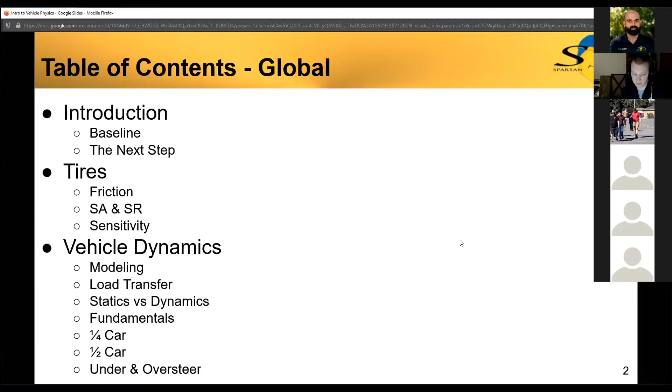Just to reiterate what Ross said, ask questions if you don't get something—there's a slide about it. So we'll be going through an introduction, a baseline of what we're talking about, and next steps. Then we'll be talking a lot about tires, and then we'll slip into vehicle dynamics. Hopefully you guys will be asking questions the whole way.

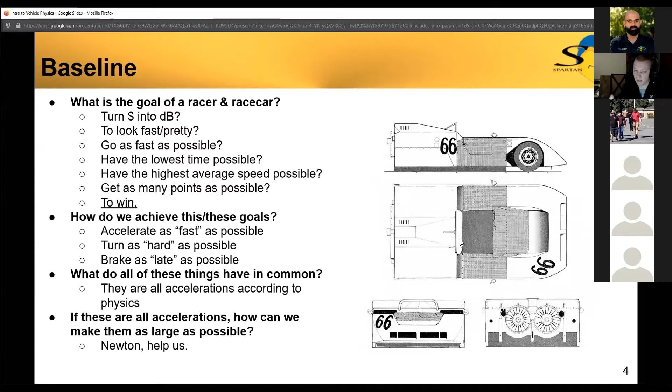Did we skip this? Oh yeah, we skipped a slide. Okay, so how do we take that to the next step? Newton's first law: objects at rest will stay at rest. You guys should all know these from high school physics. At rest in this case means in your local frame of reference. So if you're sitting in your car going 60 miles an hour, you are at rest with respect to the car.

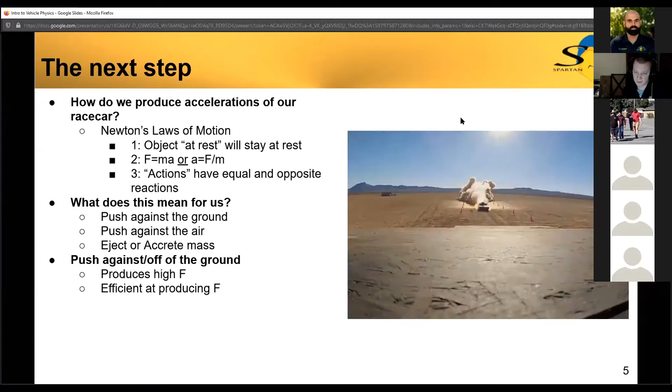F equals ma, or force is mass times acceleration. But since we're trying to maximize acceleration, it's easier to think of it as acceleration equals force divided by mass. So what we can immediately see is if we want to maximize acceleration, we need to up the force or lower the mass, or both.

And then, actions have equal and opposite reactions. What this means is basically you can produce a force, but it won't do anything unless some other force reacts against it to push you, right? So if I push against the wall, it pushes back with the same amount of force.

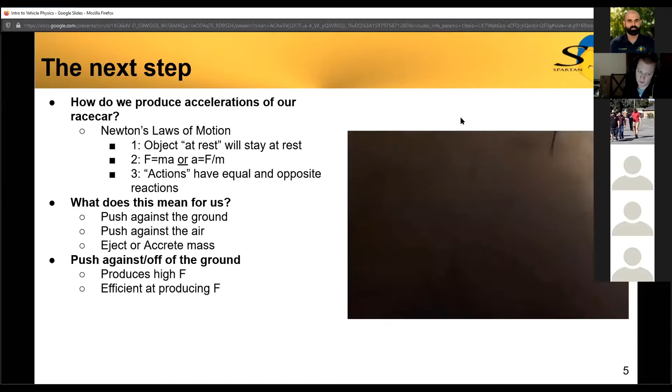So what does this mean for us? Well, we have very few things that we can push against. We can push against the ground, we can push against the air, and we can eject or accrete mass. So basically, have a rocket eject mass, or like a snow plow building up snow in front of it would be accreting mass, which isn't really practical.

So for us, the most practical thing to do is to push against the ground. And we only have 4 ways to push against the ground, and they're all tires, all 4 of them. They're one of the best ways for us to do it because they produce high forces and they're efficient at producing force. What I mean by that is, if we want to produce a lateral force, they don't produce a lot of drag force necessarily to do that, so we don't have to then produce even more longitudinal force to overcome drag.

So as a quick recap of the initial physics, physics can help us settle down to what we really need to do to win. And how do we win? Well, we get points, we get low times by making lots of acceleration, which in turn happens by making lots of force and/or reducing mass. So the way we produce forces is through the tires, through most of the forces anyway. So at the end of the day, every sub-team, from vehicle dynamics to aero to chassis to powertrain, we all serve the tires, or we serve the driver, to make it easier for the driver to serve the tires.

Anybody else? Okay, so we've established that everything comes through the tires pretty much. So let's talk a bit about tires. How do tires produce the forces that we so value? Well, first of all, how do we push against the ground? We don't have a Fred Flintstone vehicle, so we don't drive it with our feet. Tires are the only way we contact the ground, so we produce all the forces with the tires.

How do we get the most force out of the tires? Well, let's think about how tires work. So the traditional, what you learn in school, definition of friction is equal to mu times normal load. Normal load is the vertical load down on the tire, or on the object against another surface. So if you push down on a brick on the table, you have a normal load times its mu, and that allows you to push sideways a certain amount before it starts to slide.

So what are the laws governing this? Well, when an object is moving, the friction is proportional and perpendicular to the normal force. What that means is, with a brick sitting on the table with a normal load on it, we're allowed to push perpendicular, we can put that perpendicular force on it. Proportional, in this case, means if I increase the normal load, if I double the normal load, I'm allowed to double the side load before it starts slipping. That is something that is not true for tires, so I would call it semi-valid. Perpendicularity is still true, but proportionality is not true for tires.

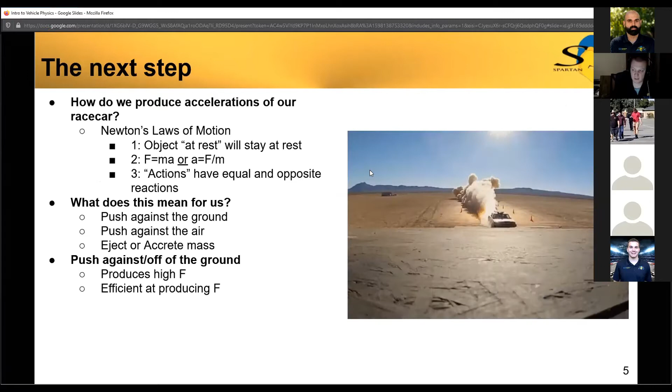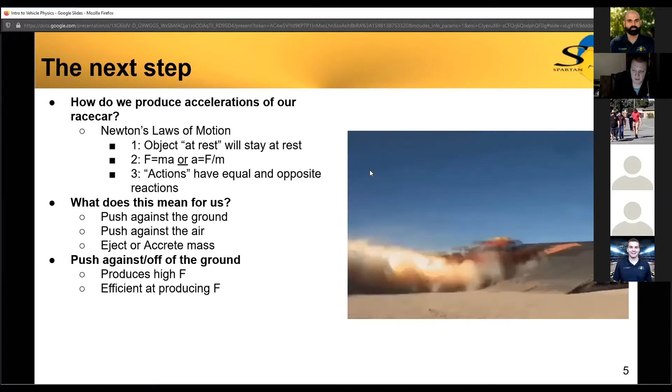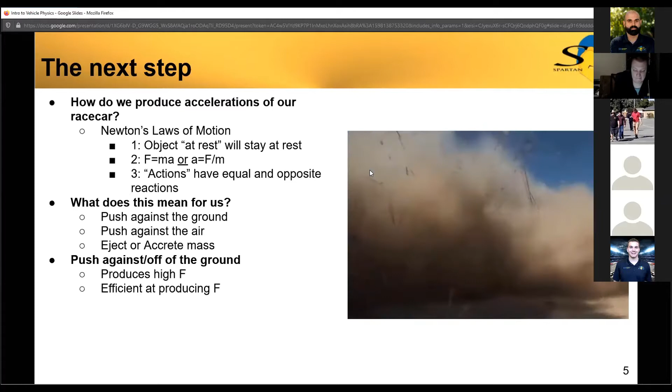Would that be 800? So the car weighs 1,600 pounds. If we divide it by 4, how much is that per tire? That's 400 per tire. And then if you have 2 turning tires, then that'd be 800, right?

Ooh, that's good. Okay, so we will get to why that is incorrect. But let me just say all 4 tires turn the car. So now how much is it? 1,600 then. Yes, hey, that's correct.

So if we increase the weight of the car to 3,200 pounds, how much lateral force could we produce? Would that then become 3,200? Well, so again, if the car weighs 3,200 pounds, how much load do we have per tire? Assuming it's evenly distributed still. That's 600, right? I apologize, I can math, I swear. Wait, 1,600 times 2, 3,200.

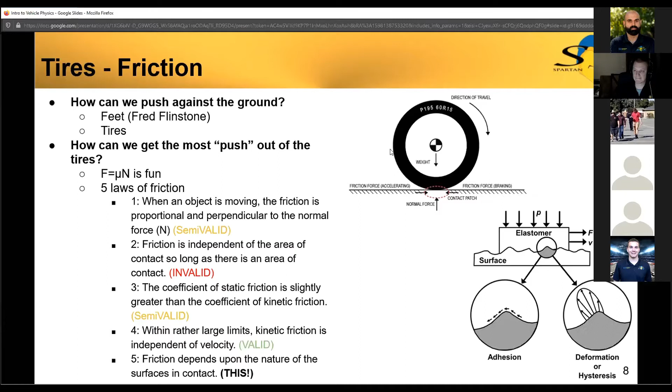I can't. They say understood. Okay, cool.

We are done with tires, and we've gone through all the questions. Tire modeling and tires are complicated, and I don't know everything about them. The only guy that probably does is Pacejka. TU Delft makes their own tires, so they're probably the best people to ask. Tires produce almost all of the forces with which we drive the car, longitudinally and laterally.

Tires produce forces by distorting the rubber at the contact patch, and we simplify those distortions into usable numbers by talking about slip angle and slip ratio. Slip angle is turning the tire with respect to the rubber and the contact patch on the road, and slip ratio is with respect to trying to torque the tire forward or backward with respect to the contact patch and the rubber. Normally those things will be in static friction.

We talked about static friction force being higher than kinetic friction force, in terms of doing a burnout versus accelerating smoothly. Tire friction is very sensitive to outside variables, some of which we have control over. I'll harp on this again: normal load sensitivity is very important.

Temperature sensitivity, we talked about with different events, can be very important. Surface sensitivity too - if it rains, or the surface at Lincoln is scored concrete, which has a different mu than the surface at Michigan, which is asphalt.

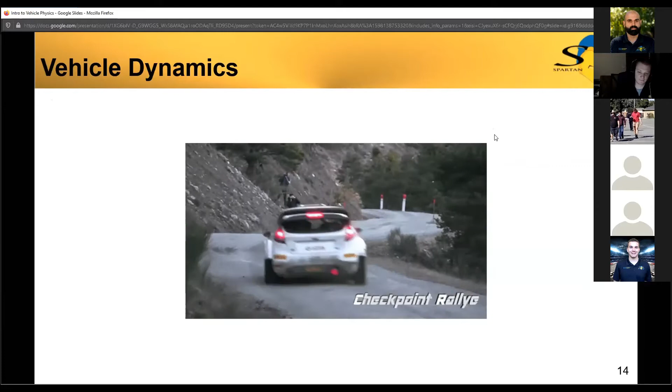So we skipped - this is vehicle dynamics. Welcome. It's mostly about keeping loads as evenly distributed as possible. This will be the very fundamentals of vehicle dynamics.

We're going to try to explain it in a way where even if you're a freshman, you can gain some intuition about it. First, I want to talk about modeling a little bit, because we do a lot of it in vehicle dynamics, but this stuff applies to anybody on the team, whether you're doing an FEA on your brake rotors or a CFD sim on your wings. All this stuff really applies.

Whenever we model something, we're making an abstraction of reality - it's not a one-to-one of what's really going on. We generally make simplifications when we want to model something, and it's important to know what simplifications we're making and how that might affect the results of our model and what we're seeing. So when you go about modeling, whether it's FEA, CFD, or some of the stuff we do here in VD, you want to think about what you want to model.

So that will tell you what you're trying to get out of it. And with that in mind, you only want to make your model as complex as it needs to be. You don't want to make it arbitrarily complex, adding computation time or factors that don't really matter. The more complex you make it, the more room you add for mistakes.

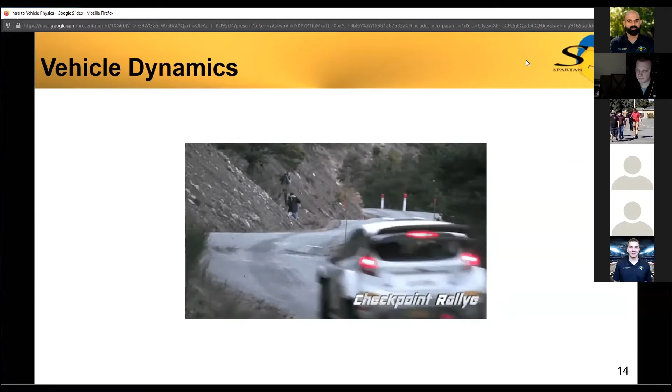Load transfer, maybe? Yeah, that's a very good one. You would also want to model your aero loads, right? Maybe not in the same way the aero guys do CFD, but your aero loads go into everything — that affects the amount of force your tires make. You need some model of a powertrain, a braking system, as far as what forces and torques it can generate. So you do a little bit of everything because we're concerned about the vehicle as a whole, maximizing our accelerations at any point so we can win.

And one other thing I would add is it's very important not just to understand the fundamentals and draw free body diagrams, but to know how you'd recognize garbage. So if at all possible, it's important to go back and look at data, or collect data if you don't have it, to validate whether your simulation is producing garbage or values you'd expect.

That's a great point, because oftentimes you won't know if it's garbage unless it's ridiculous — like, oh, our car can go infinitely fast? Yeah, my model's probably garbage. But oh, we can produce 2 Gs of acceleration? Maybe — but we should probably go collect some data and see if that's true. That's a really good point. Cool, I don't know if I have anything else to say on that one.

Okay, Ross, you want to take it away? So Cass, you brought up an interesting point, something called load transfer or weight transfer, depending on who you talk to. A lot of people don't like it when you say weight transfer, but I like to say weight transfer, as long as we understand that weight is not the same thing as mass.

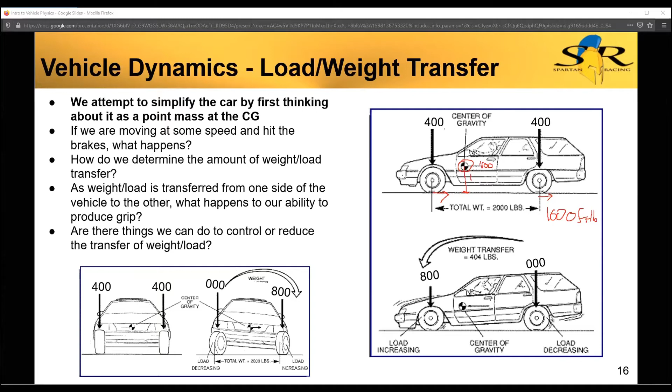Does everybody understand torque, like how torque works? I don't know if we have freshmen in here that may not have gotten that far yet. Hopefully, if we do have some freshmen that don't understand this, they will speak up because it's important. I have no idea how torque works. Oh yeah, me neither. Can you explain? I could tell by your tone. All right, Arash, you can explain torque.

Okay, so I guess the simplest way to think about torque intuitively is imagine if you had a bolt that was tightened down on something and you wanted to remove it. If you just grabbed it with your fingers and tried to unscrew it, it would probably be pretty hard. But if you grabbed a wrench and put it on, all of a sudden it's a lot easier to loosen that bolt. So you have a point here, and now you have your wrench handle, and you're putting a force this way. So that force and this lever arm here is going to create a torque - it's going to amplify the effects of your force on that point.

Another way to think about it: if you're going to open a door, there's a reason why a doorknob or door handle is on the opposite side of the door from the hinges, because that force you apply on the opposite side of the hinges makes it a lot easier to open the door. Imagine, you can get up and try this right now - it's a lot easier to open and close the door pushing from the doorknob than pushing from right where the hinges are. So it's basically some sort of lever arm amplifying the effects of your force and the rotation that it causes. Thank you.

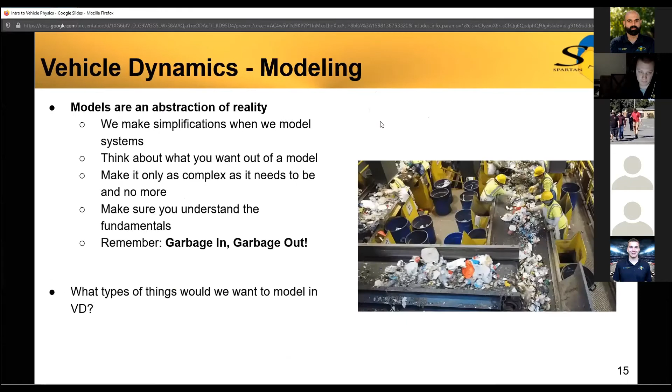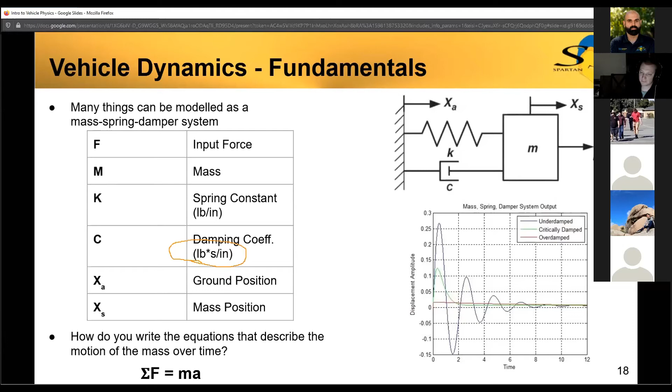So if you think about the case of our car, if it's the driver putting in a steering input and the car's rolling, that interaction or that input is going to have a different velocity than you driving over a speed bump at 100 miles an hour, or driving over a pothole, which is all going to give you different damping. Yeah, if I may for a second.

Most of us have driven down the freeway and seen a car with quote unquote blown shocks, right? So their dampers are not working particularly well. If you see them driving down the freeway, they hit a bump and the car just goes whoa whoa whoa. That's because there's no force slowing that oscillation, which is what the dampers do. Sometimes you can even see their rear tire, or whatever tire has a blown shock, just rapidly going up and down.

So yeah, the damper provides a force. Let's say the spring's providing a force this way, the damper is going to provide an opposite force that kind of slows down that motion. You can think of it like friction. In some cases it's literally friction, in some other cases it's not, but you can think of it like a friction force that's slowing down the mass's motion and controlling it.

And I think the example we were using here was, if we go back to the example we used earlier to talk about torque, we talked about opening and closing a door at the door handle versus at the door hinge. So if you think about the doors at school, they have this thing at the top usually, and that's a damper. So if you open the door and you let go, it doesn't just smack back in your face, it slowly comes closed. And if you're an asshole like me and you open the door and you see someone behind you and you want to try and close it on them, you have to push really hard to close it, because the damper is fighting you the faster the door tries to close.

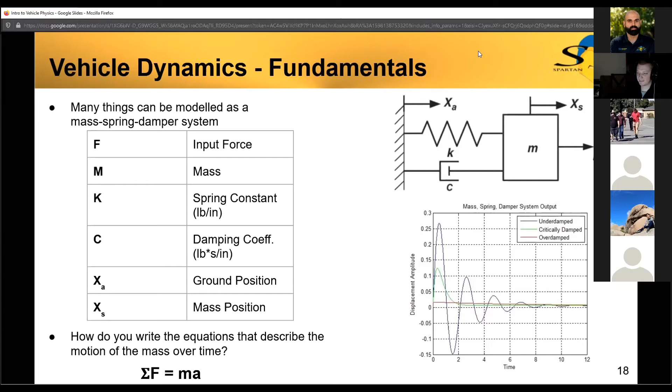Does everyone understand the basics of a mass spring damper? If you need clarification, please speak up. Again, this only gets more complicated. Yes, it's going to get more complicated. Okay, understand how it works and why those oscillations are important.

And tires are actually air springs, so they actually have a spring rate, which might have been intuitive based on how we were explaining them so far. The tire spring rate can change based on how much pressure you put in the tire. If you've ever seen a car driving down the road with a low tire, you physically notice that tire is a little more squished because it has less air in it, so it has less spring rate. It's not going to hold up the car's weight as well as a really pumped up tire. So pressure can affect the spring rate. Temperature, by the way of changing pressure, can affect it, and temperature can also change the properties of the rubber, which can affect spring rate, and so can normal load.

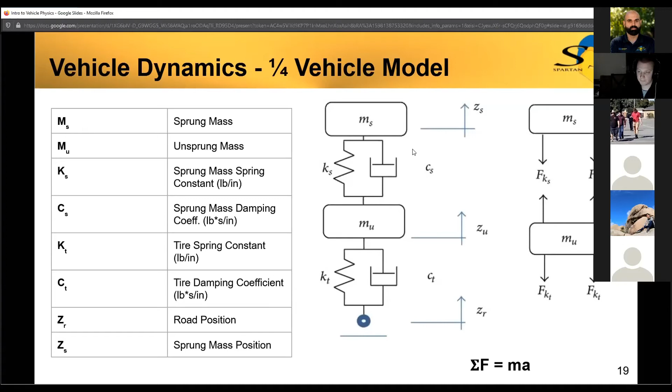Yep. All right. Thank you. Speaking of half car stuff... funny you should ask, Cass.

So what I'd say is we actually took the quarter car model and threw it away, because that was moving vertically. We are ignoring vertical movement here. We're assuming we're driving on a piece of glass - it's perfectly smooth, there's no bumps up and down.

Exactly, you imagine this is like one atom high car. That's what it is. So what a half car model does - where a quarter car model let us look at some dynamics of suspension and dampers and everything, this lets us look at a very simplified view of the dynamics of the car, at least in acceleration.

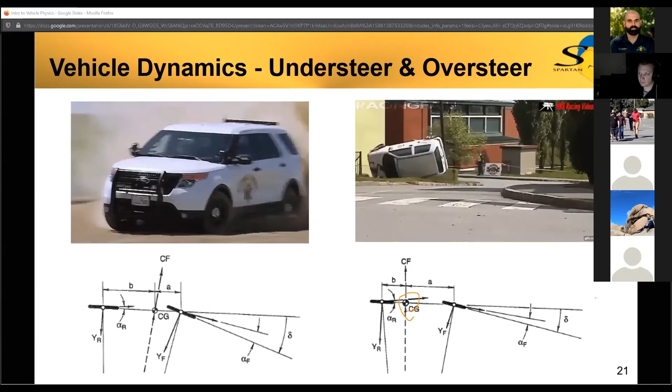So now we have a force from the rear tire, and now we have a shorter lever arm than the front. So what does that say about the force from the front? It has to be lower, right? And how do you generate a lower force in order to balance this moment? You steer less, so now you need less steering. So for this car, if we had that same radius corner that the 50-50 car went around, to make that same radius corner, you would have to steer less because now your front tire has a bigger lever arm, so it needs less force to balance the moment from the rear.

Thanks, Trevin. So now, go ahead, dude. Sorry, so yeah, I actually have a question.

When you go into this kinetic friction mode, does rotational velocity of the tire matter, or is it just based on mass, direction, and the initial inertia you have? You mean how fast the tire's rotating? Yeah, like if you just let go of the throttle versus if you hit the brakes. I mean, I guess it doesn't matter once you're in the kinetic phase, or does it?

Letting go of the throttle and hitting the brakes changes your weight transfer, which can change how your car behaves. But I thought once you're in the kinetic phase, none of that really matters too much. It still matters, right? The tires aren't like where you have grip and you just fall off a cliff. You have some room where you still have force after the limit, so you have this region where you have less force, but you can still produce some force. I see, so that makes sense.

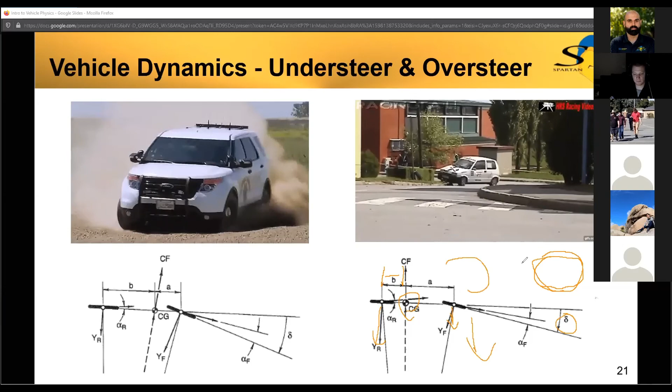Let me just finish my thought on this real quick. For the oversteer car, like I said, for the same radius corner you need less steering. So if you had the same steering as a 50/50 car, you're going to be turning a smaller radius corner because now the front is going to have a higher force. You're going to have a net moment in, so it's actually going to turn a smaller radius, or it's going to oversteer the corner.

That makes sense? Yes it does. Okay, thank you. Hey, I just thought of something else—let's just put the CG aside, make it fixed. Can you go back to the first few slides where there was a graph for the tires?

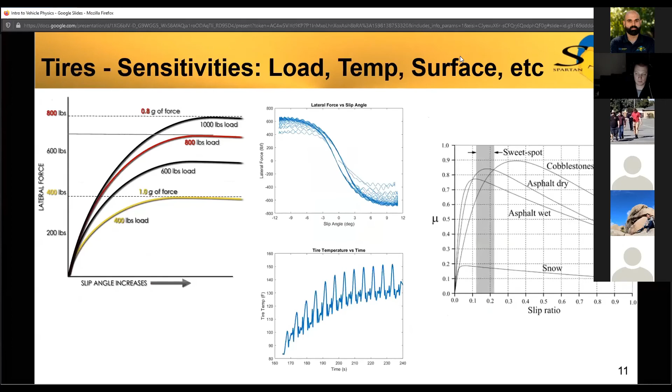The tires, this one? Yeah, the one with the blue and the green curves. Okay, so on the graph, where would the position of the understeering and oversteering cases be?

Okay, so if we're talking about non-kinetic friction, let's stick with the understeer case. The rear slip angle is lower than the front slip angle for a given radius corner. So your rear slip angle might be here and your front might be here. If the driver is right at the limit and not in kinetic friction, they'd be driving with the rear slip angle here and the front slip angle here. But if they go any further, they're going to start going into kinetic friction on the front tire, and that may or may not be faster.

Actually, if we think about it theoretically, it would be fastest to drive right about here, on both sides of the curve. Oh, actually in this case that would make it an understeery car—that would cause you to... no, that would not be faster. You would want to be driving where your front tire is able to generate more force. Oh, you do need that extra force. You're right—because otherwise we're plowing. If you have equal force, you're going to have that moment from the rear tire pulling you out of the corner.

So your front tire could maximally be here. Otherwise your corner radius is going to increase, or you're going to plow out of the corner—you're going to end up like that cop.

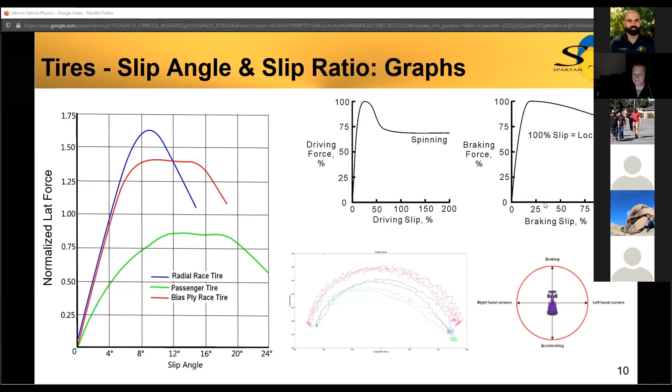You can't see it in the GIF, but there's a donut shop off to the side. Yeah, exactly—good thing we don't have any cops in the audience. It's fine, my father-in-law's a cop, he would laugh. I see, yeah.

Is understeer and oversteer clear to everyone now, and also just the basic, very fundamentals of steady state stuff? Yeah, and oversteer and understeer can exist in kinetic friction too, but the drawings at the bottom would be way different.

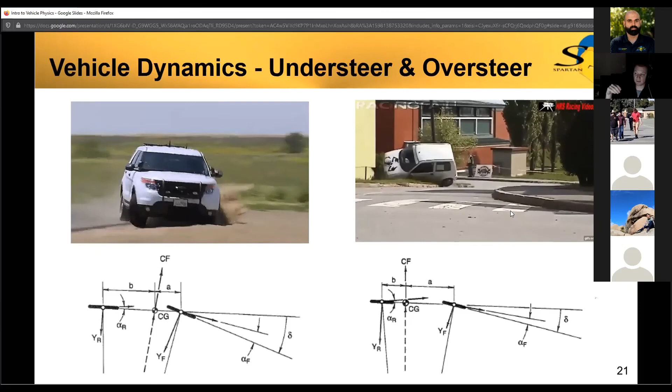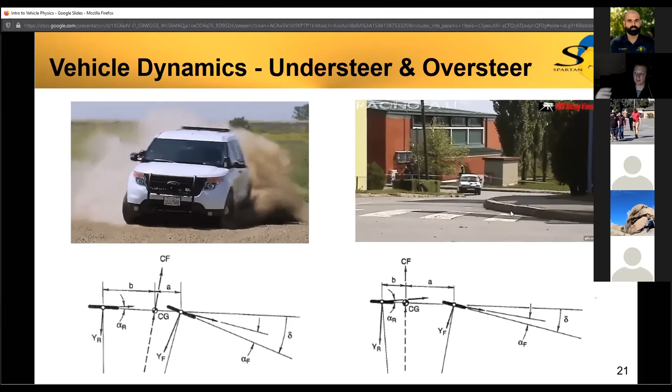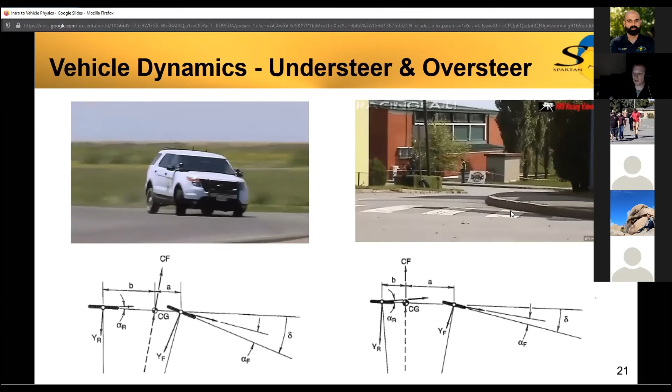Someone mentioned something about the speed relationship, and without getting too deep into it, one intuitive thing to think about—that everyone has experience with—is how your car steers in a parking lot. At very low speeds, you intuitively drive differently so you don't clip things, because the rear cannot generate large slip angles when you're moving very slowly. It doesn't have time, or distance in this case, to produce the slip angles to move the rear of the car. So you go further before you turn the wheel sharply, in order to go around things.

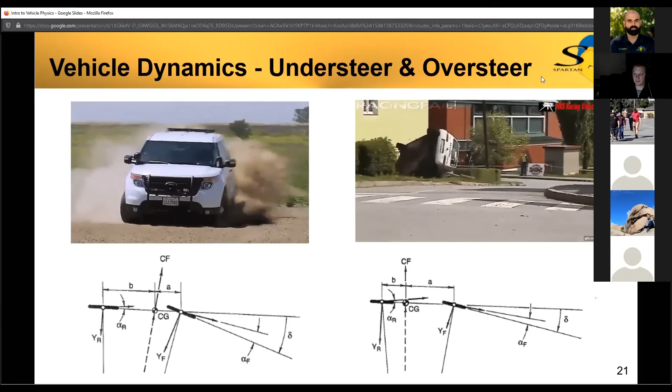Alright, let's do some recap and then try to finish up. We've gone way over, but that's just VD life. Yeah, no, this has been great. Thank you, guys, I'm glad.

I hope some of this stuff sticks, or at least makes intuitive sense, and you understand how the car works better now—why aero works, why you need shocks on a car, and what's happening when you turn the tire. Or you find a way to apply it to your particular section.

Now you can see why the 911 is so oversteered too. What? Yeah, for sure.

Like we said, as you guys have probably seen, VD and its modeling can be pretty complicated. This is as simple as we could try and make it. It only gets worse from here.

I actually had a full head of hair before I started on VD, and look at me now. Arash does all the work. I don't do shit, that's why I'm not bald.

So with VD, we try to model the behavior of the car and how it reacts to different things in order to make it faster and easier to drive. You can look at things like steering force, steering effort, and steering angle needed to make it easier to drive. Like I mentioned before, you only want to make the model as complex as it has to be and not anymore, otherwise you're just trying to flex or making your life harder for no reason. Make sure you correlate your model to reality to prove some validity to it, one to intuition, and two to some sort of test data or physical actual data.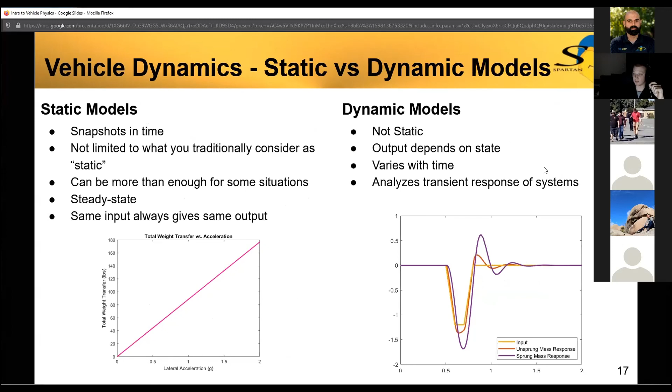Which tires turn the car, or cause it to produce lateral force? Or yaw, either way. Talking not about yaw, I'd say the lateral force. Rear tires. People are saying 50-50 in chat. People are right, yes. Thank you, people. For a square setup.

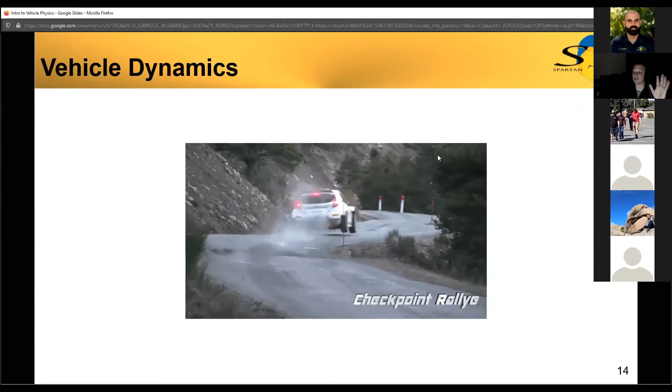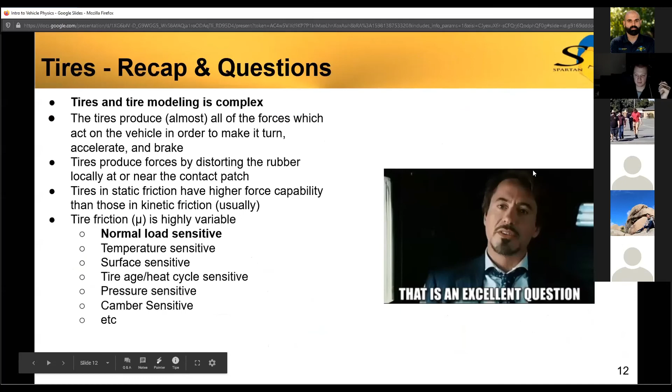Let me go back to my little drawing. This thing is so laggy. Okay, so we had acceleration equals 0, 100. Braking equals 25, 75. Cornering equals 50, 50. So where do we want the CG?

It sounds like an engineering trade-off. Yeah, I don't know if it's just me, but... What'd you say? Cass, you cut off.

He gave up. We got stuff in the chat. He gave up on us. The 50-50 was from before. You guys hear me? Yeah, now we can hear you. Okay, sorry about that, I don't know what happened.

So what was your answer? It wasn't 50-50, I'll tell you that. I heard 50-50 is the right answer, so now it's not? Well, what do you think the ideal weight distribution is for turning? No, for all cases, overall, for a vehicle. Oh, for a vehicle. I think the ideal is always 50-50.

You would still think the ideal load is 50-50? So you mean we designed our car to not be ideal? What if we had just a dragster, what if we were just doing drag races, drag racing where you're just going straight? Yeah, then you want most of it rearwards because that's where all your moment is coming from, right? Okay, so then it's not always 50-50. We have an accel event.

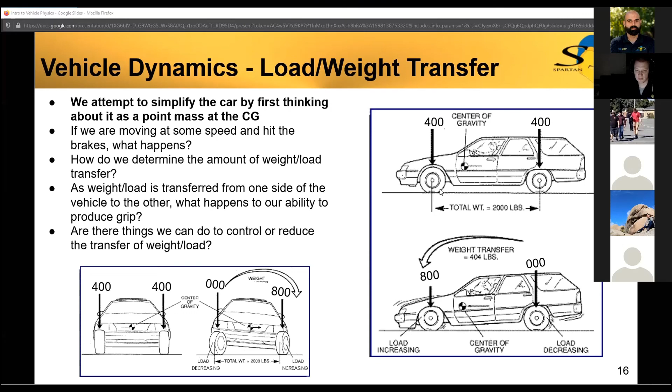One other thing we glossed over in this model: Arash mentioned we have a drag force here because the tire's turned. In our case, we have to overcome that with a drive torque inputted by the rear wheel, so you end up with a counterbalancing force to keep a constant speed, in a rear wheel drive car. If we had a front wheel drive car, you would have to drive this forward such that it would end up going this way, otherwise you would lose speed.

Any other questions before we kill it? There's one on the chat that asks, what do you define as stability? That was me asking Ashwin. Oh, I didn't see who asked. We didn't really get too much into stability. Stability is a tough animal. He was thinking if a slight forward weight bias would be more stable under acceleration, and I was asking what he defines as stability.

Sorry about that. No, it's all good. It's good to think about for everybody—stability is important to think about. People just say words like that and maybe don't think about what it means for a car. We talked about it earlier with James, saying if we had a Mustang with a billion horsepower going down a straightaway and the driver mashed the throttle and started doing a burnout, would they be able to go straight? The answer was yeah, if everything was perfect. But this is an inherently unstable system, because if they have any lateral force, that will induce a slip angle, which will continue to increase, and everything becomes unstable.

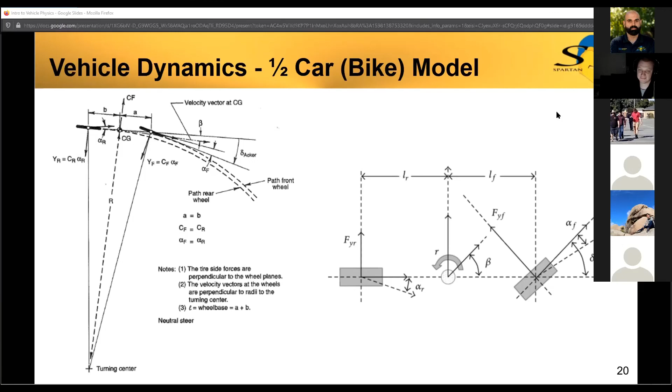Thank you very much, guys. This was absolutely awesome and very informative. Anytime, thank you. We can both talk about this stuff until we lose our voices. You guys weren't kidding about getting confused on Saturday, man, I'll tell you that. Thank you. Yeah, the more you know, the more you know you don't know. The circle keeps on growing, man. All right, guys, thank you, appreciate your time. Thanks, guys. Good night, good night. Thank you, guys.